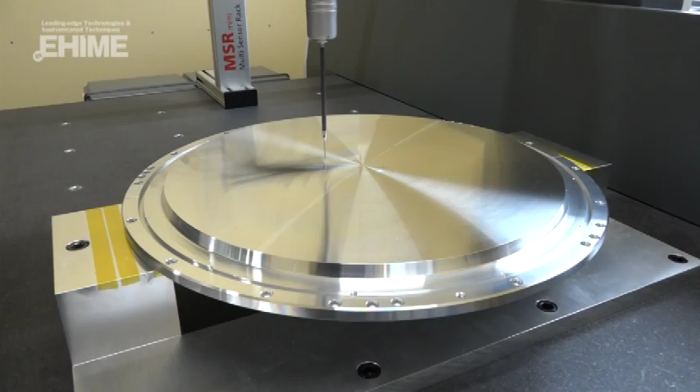Numerous companies attracting attention for their product creation abilities, both in Japan and overseas, are located in the city of Niihama in Ehime Prefecture.

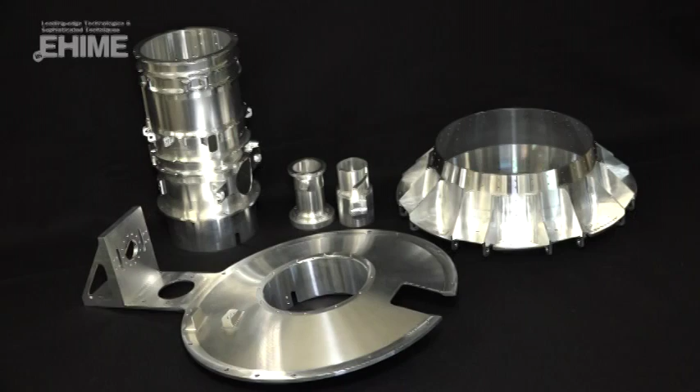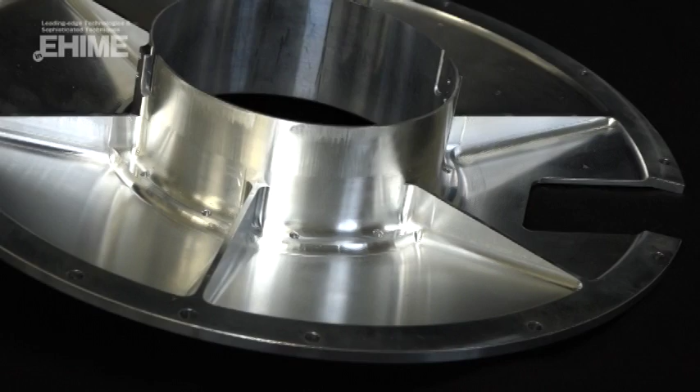This is COS21. COS21 produces components for the aerospace industry, a field which demands high precision. COS21 was in charge of machining the sample collection system for the Hayabusa project, an unmanned asteroid exploration probe. Components making use of COS21's technology and skills were also loaded onto Hayabusa 2.

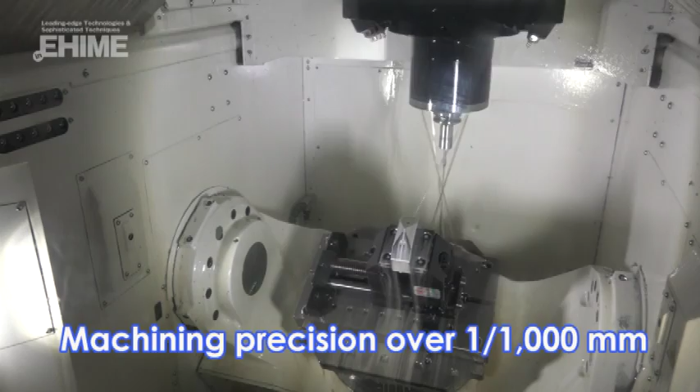Specializing in the precision machining of aluminum and magnesium, COS21 achieves machining accuracies in excess of 1/1000th of a millimeter, among the highest in the world. COS21 provides a stunning 70% of Japan's aluminum sputtering targets.

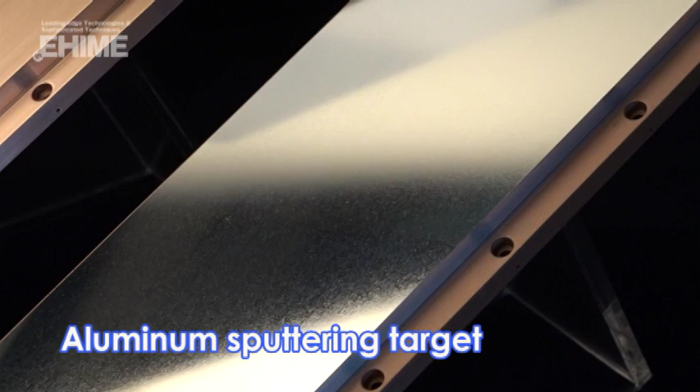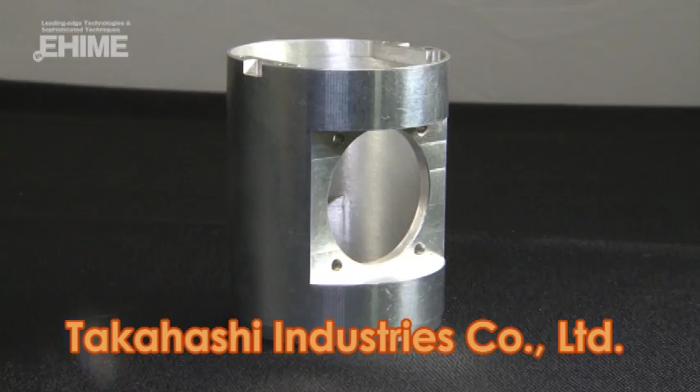Hayabusa was also equipped with SUGOWAZA technologies from 2 other Ehime companies. Takahashi Industries was in charge of machining Hayabusa's sample catcher. Specializing in the precision machining of difficult-to-cut materials, Takahashi Industries is the only company in the world mass-producing pure nickel components for semiconductor production equipment.

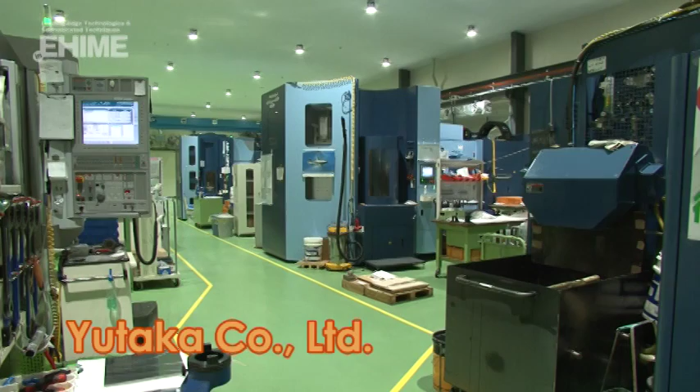Components machined by Yutaka were also used in Hayabusa. Yutaka also specializes in precision machining and has made brilliant advances into the aerospace industry.

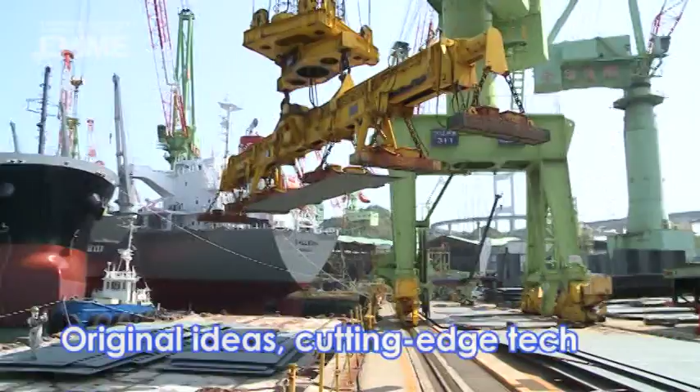In fact, Ehime Prefecture is packed with so-called SUGOWAZA companies, manufacturing and product-oriented companies making use of original ideas and cutting-edge technology to expand their markets both throughout Japan and the world.

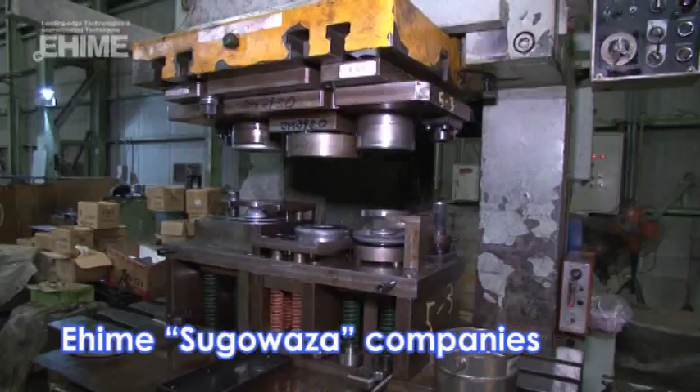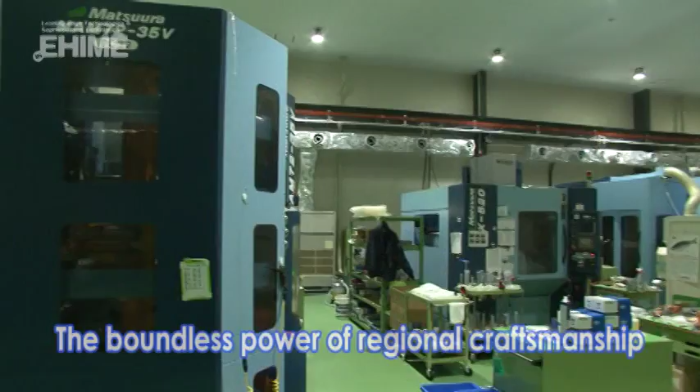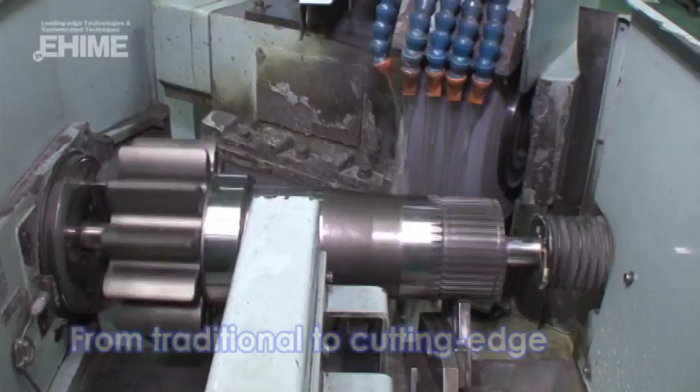Ehime's SUGOWAZA companies continue to take on new challenges by harnessing their diverse backgrounds. They are also taking technologies cultivated over years to new heights. The power of Ehime SUGOWAZA is boundless. Ehime Company Limited is a true challenger and innovator.

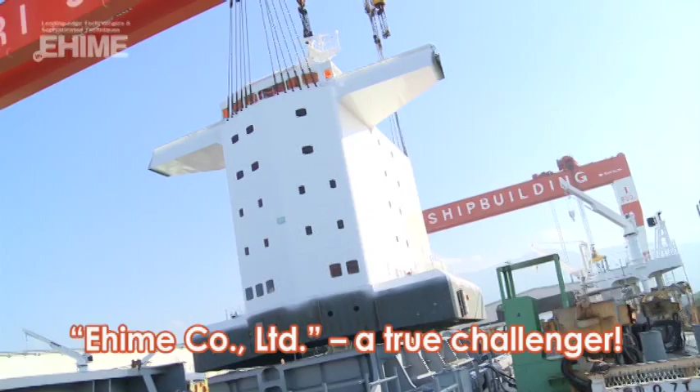In fact, to those in the know, Ehime is a key industrial prefecture, accounting for approximately half of the Shikoku region's product shipments and continuing to grow as an industry-oriented prefecture.

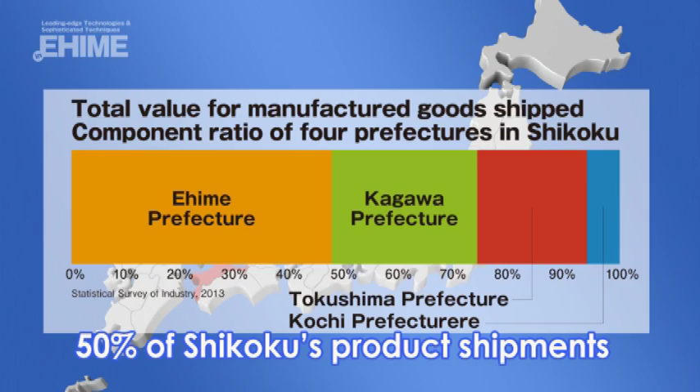Products from Ehime are used far and wide, not just in Japan, but around the world. You just may unknowingly have a product made in Ehime in your own home or business.

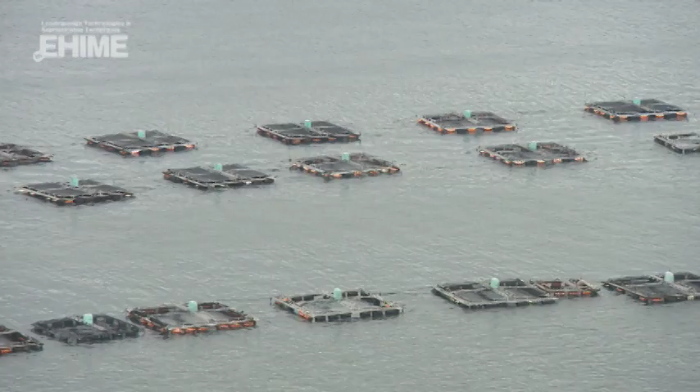Ehime Prefecture is blessed with an abundance of natural beauty and possesses flourishing farming and fishery industries. Thanks to cultivar improvement efforts and technological innovation, the prefecture has experienced particularly striking growth in the production of citrus fruits and fish aquaculture, and has maintained the top production in these areas in Japan for many years.

Ehime is also focusing on flowering plants, including the recent development of a new variety of delphinium named Sakura Hime. In the area of manufacturing, much attention is being paid to the branding of Ehime's traditional Imabari towels. Ehime is well known as the top producer of towels in Japan,

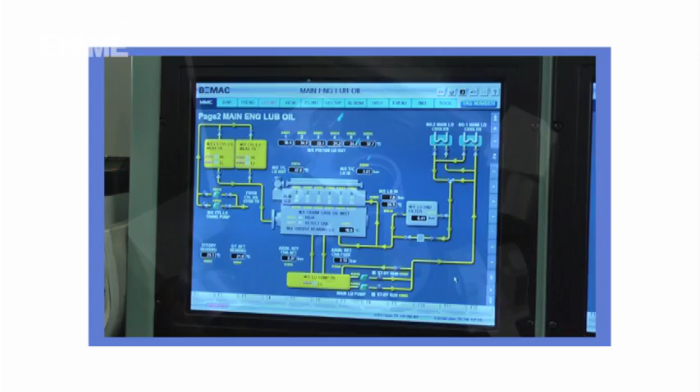but in fact, the prefecture boasts many companies with the top share in their Japanese market in a diverse array of fields, as well as numerous enterprises in possession of one-of-a-kind technologies and techniques.

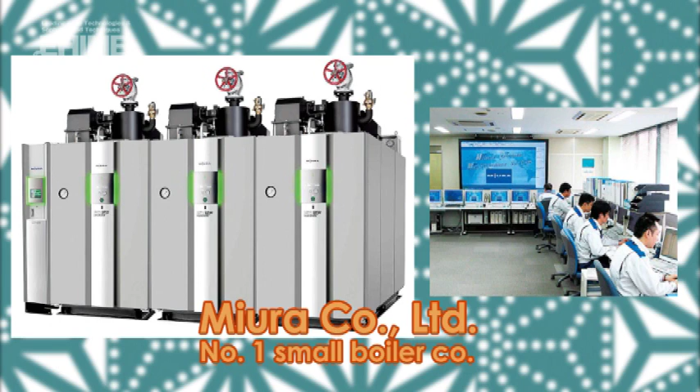Some examples include Miura, which holds an overwhelming share of the nation's small once-through boiler market and has grown into a comprehensive manufacturer of energy-saving equipment and appliances.

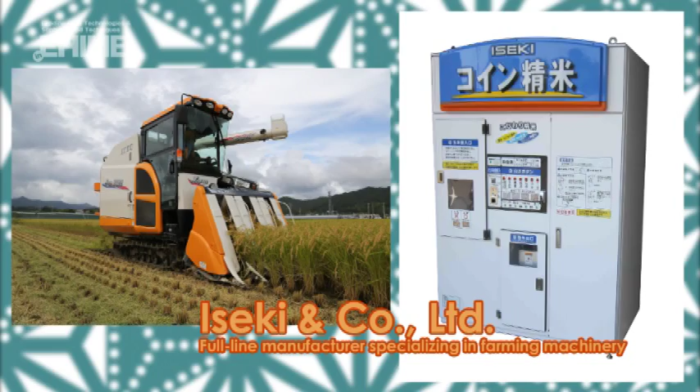Iseki, one of the top comprehensive agricultural machinery and equipment manufacturers in the country. Imabari Shipbuilding, which boasts the highest volume of new ships built in Japan and which is also one of the top shipbuilders in the world.

In addition, since ancient times, the Ehime city of Shikokuchuo has flourished as a production center for paper, and today it ships the greatest number of products in the paper and paper processing industries in Japan.

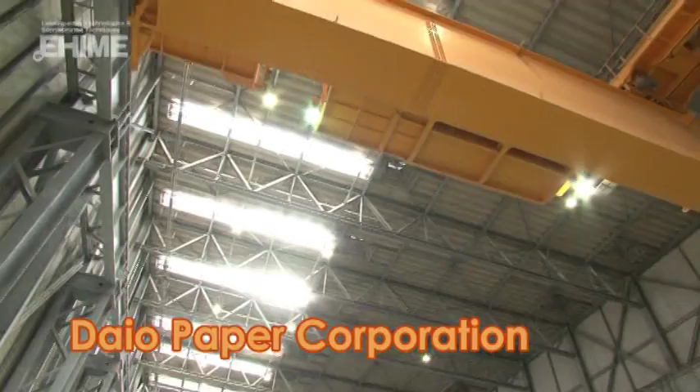Of particular note is Daio Paper, which operates a plant that produces more paper and cardboard than any other single factory in the country.

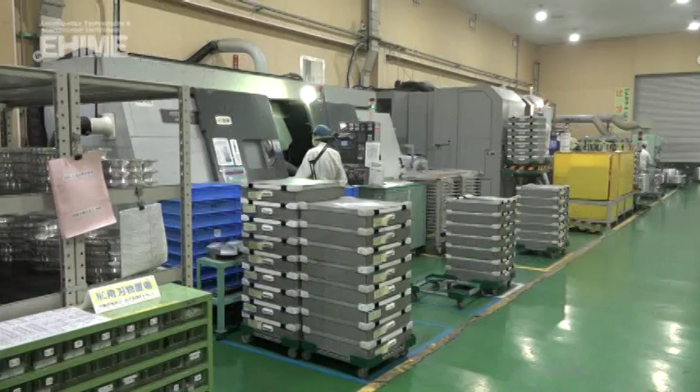Ehime is distinguished by the numerous companies which harness the geographical merits of their locations, make skillful use of regional resources, and employ the diligent local residents raised in the area's temperate climate to further refine their technologies and techniques and continue advancing forward on pioneering tracks of development and growth.

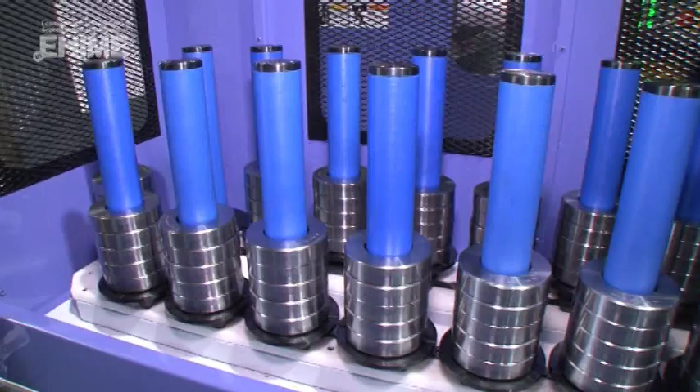Now, let's take a look at some examples of manufacturing and production companies which are backed by long histories and which have continued to grow throughout the years.

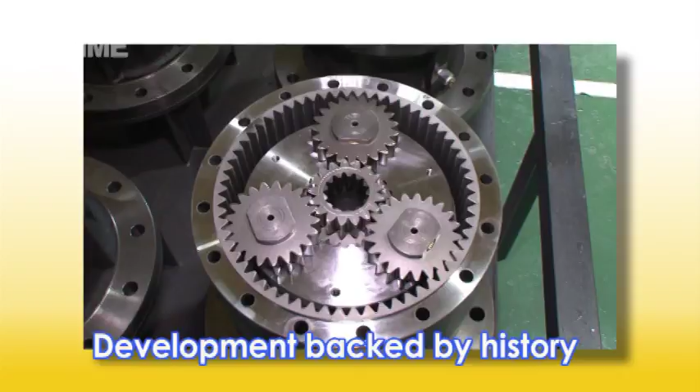From the time the Besshi copper mine opened in 1691, the city of Niihama grew as a corporate town under the Sumitomo Group. Today, the city has accumulated some of the most technologically advanced companies both in Japan and the world, including the metals, chemicals, heavy machinery, and small to medium machinery industries.

One example is Nishioka Iron Works. The company started as a subcontractor for the Sumitomo Group producing tanks.

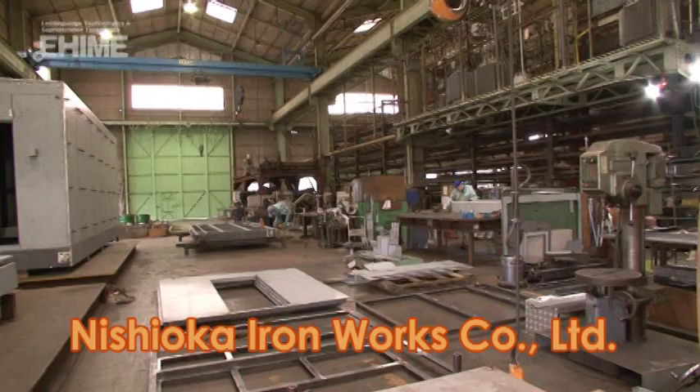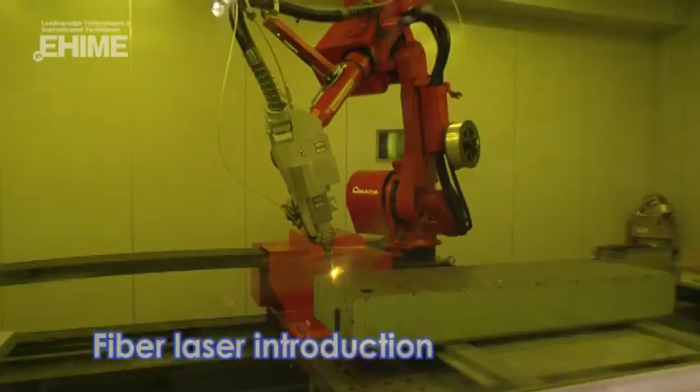Nowadays, making use of such cutting-edge equipment as fiber laser welders, Nishioka Iron Works is one of the leading companies in the nation for thin sheet metal production, creating control panels and a variety of machine covers.

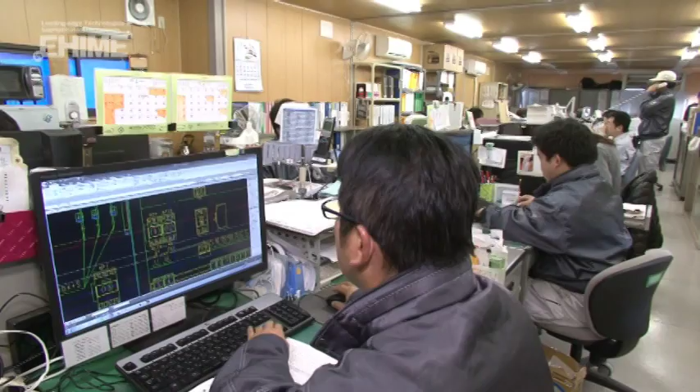Via its integrated production system with group company Nishiki Denso, Nishioka Iron Works has grown to become a manufacturer able to handle the entire production process, from design to manufacturing, painting, assembly, wiring, and inspection.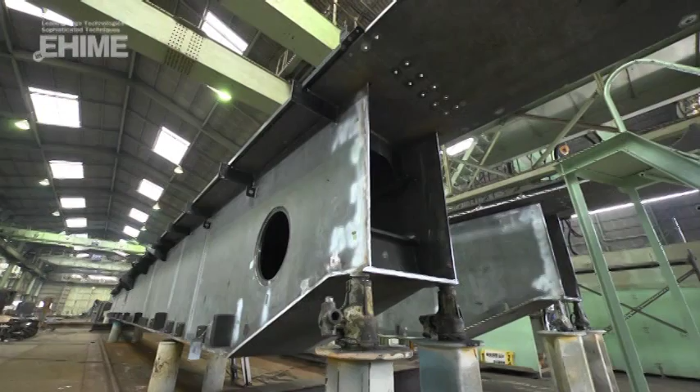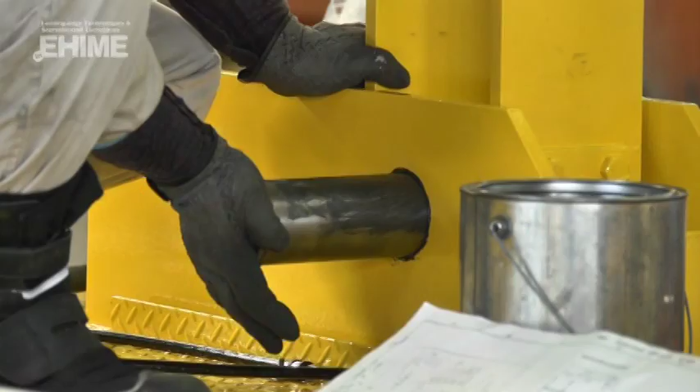Sanko Machinery is also a company which got its start as a factory subcontracting for Sumitomo Heavy Industries. Specializing in overhead traveling cranes, Sanko Machinery manufactures ladle cranes for steel mills and cranes with hooking beams for shipyards. Offering cranes up to the 60-ton class and 48 meters in height, Sanko Machinery boasts high customer satisfaction.

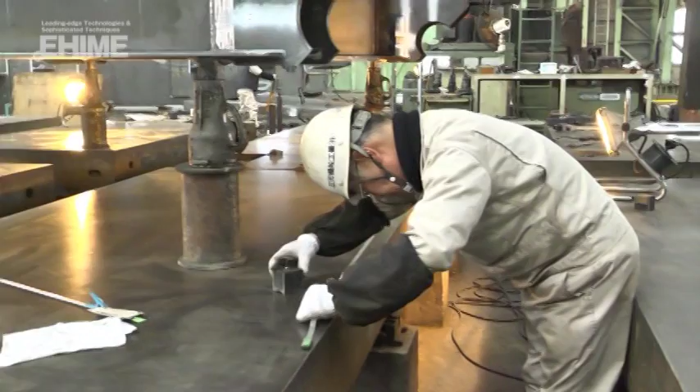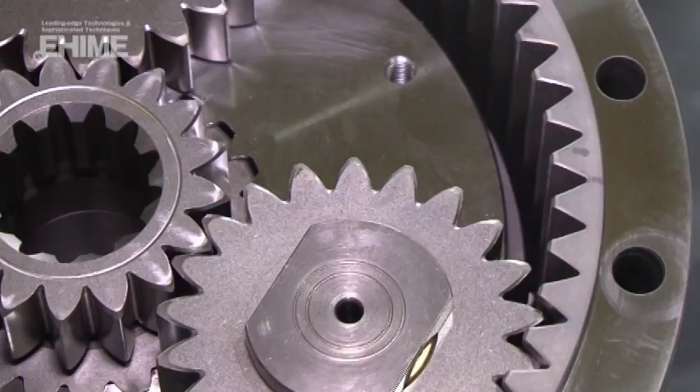Another Niihama-based company produces components found in approximately 30% of all construction equipment worldwide. Sogabe Ironworks' planetary gear mechanisms, the company's flagship product, are used in travel reduction and rotation reduction devices for power shovels. At home and abroad, the high precision of their products have been well received by customers.

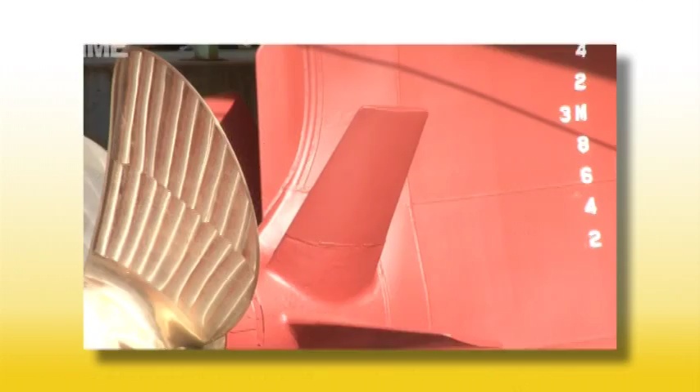Next, we'll look at companies which are continuing to take on new challenges while harnessing strength cultivated over years.

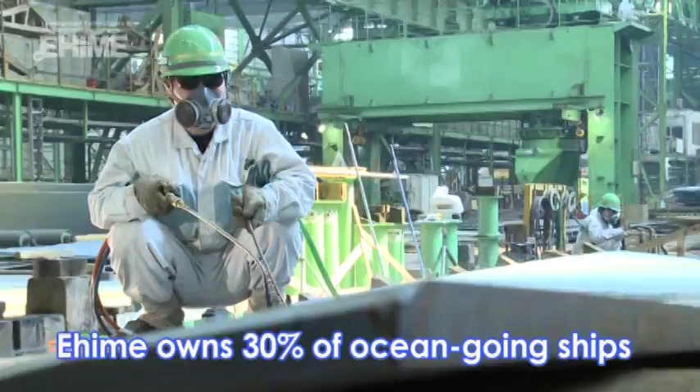The city of Imabari has long been known as a shipbuilding and marine transport town, as well as home to numerous ship owners operating sea shipping businesses. In fact, Ehime Prefecture is filled with ship owners. The ocean-going vessels of Ehime's ship owners comprise over 30% of ocean-going ships operated by Japanese marine transport companies, totaling some 2,700 in all.

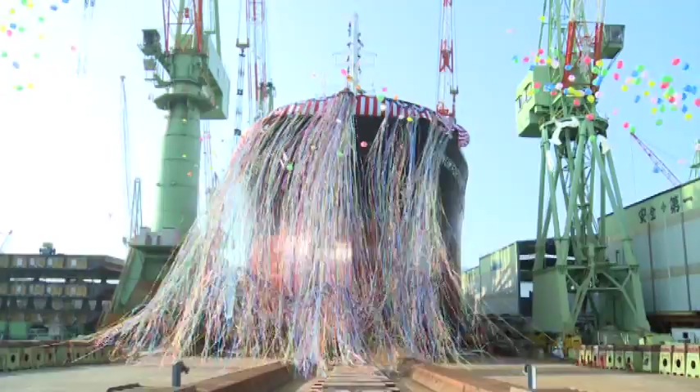Shipbuilding companies boasting some of the top production volumes in the world are also located in Ehime. Indeed, Ehime contains a great number of businesses involved in shipping and the production of ships.

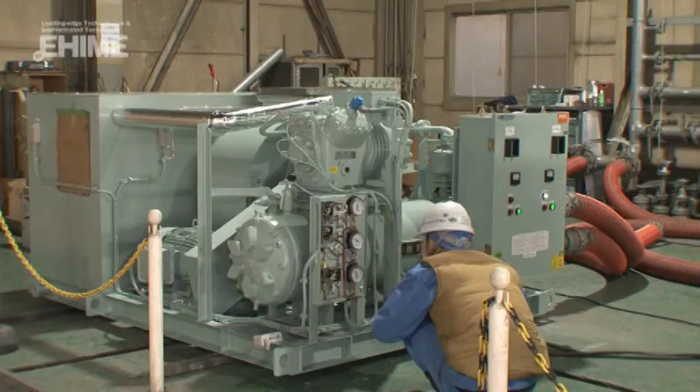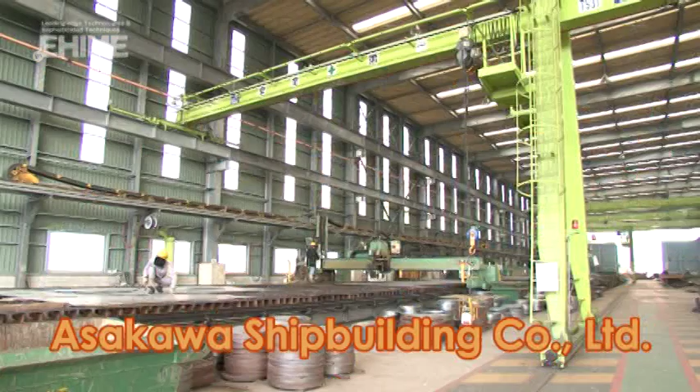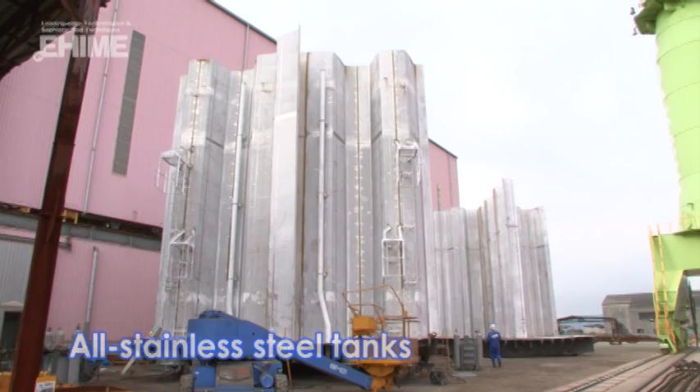Asakawa Shipbuilding specializes in chemical tankers, and they have made unique advances in the field. Over 30 years ago, Asakawa Shipbuilding began using all stainless steel tanks, seen as being very difficult to manufacture. The company is a world leader in the construction of chemical tankers with all stainless steel tanks.

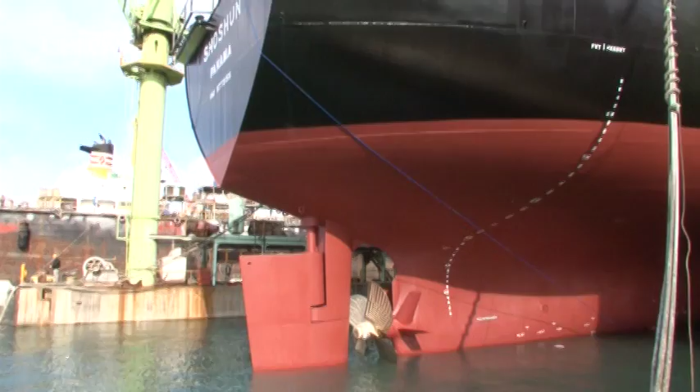Asakawa Shipbuilding has also developed the Friend Fin, a device which improves propulsion efficiency and saves energy. The Friend Fin improves fuel economy by 6 to 8%. Asakawa Shipbuilding is dedicated to developing new technologies.

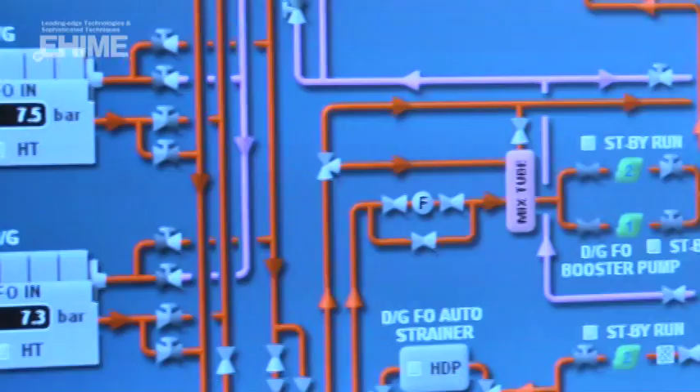Uzushio Electric boasts an overwhelming share of the domestic ship electrical wiring and switchboard installation market. An astonishing 5,000 ships currently in operation are equipped with the company's products.

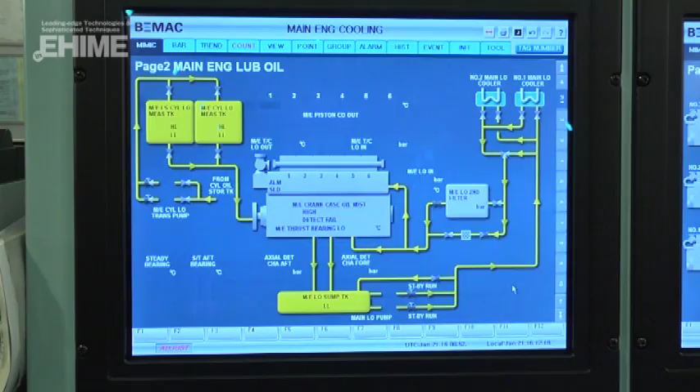Uzushio Electric also provides 24 hours a day, 365 days per year after-sales service for ships operating in waters all over the globe. Now the company is harnessing technology it originally designed for ships to develop electric vehicles. Uzushio Electric is using the new push to go on the offensive with a focus on Southeast Asian markets.

Other Ehime companies are taking on the challenge of turning traditions into innovation. Since the Edo period, the city of Shikokuchuo has flourished as a production center for mulberry and Oriental paper bush, sources of raw materials for making paper. Supported by an abundance of water resources, the city's paper industry grew and thrived.

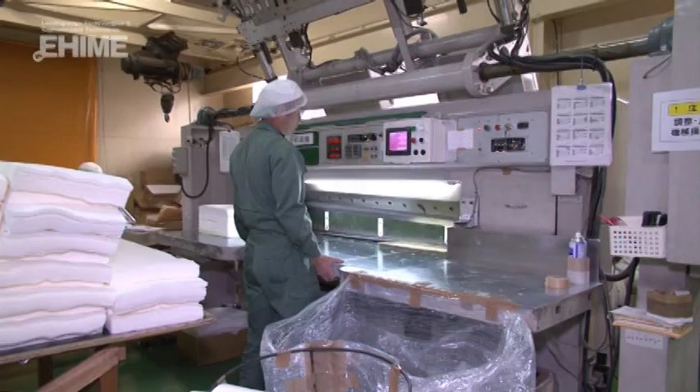Today, some 200 companies involved with paper still operate here, with the city boasting the greatest shipment of paper products in Japan's papermaking and processing industries. In this town of traditions and storied businesses, there are companies which continue to take on the challenge of developing new products and taking on new markets.

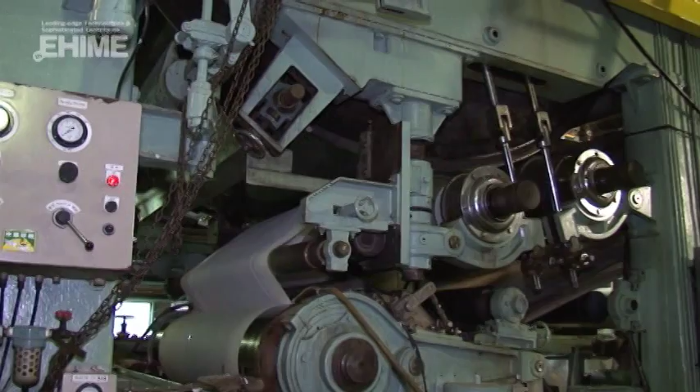Miki Tokushu Paper developed the world's first chemical synthetic fiber paper in 1958. Miki Tokushu specializes in specialty papers such as protective food packaging and insulation paper, boasting a high share in this market.

The company applies technologies such as nonwovens, including reverse osmosis water treatment membrane, vacuum cleaner bag, and foodstuff filters, in addition to spunlace and saturation, to offer products which meet real needs to customers around the world.

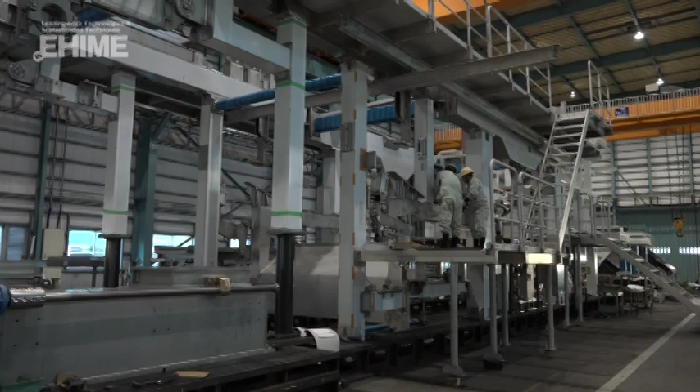Meanwhile, other Ehime companies are supporting the continued growth of the conventional paper industry. Kawanoe Zoki is the top producer of machines for home-use paper in Japan. The company's paper machines, such as the flagship BestFormer Yankee paper machine, offer fast startup and uniform paper texture, boasting over 80% domestic market share.

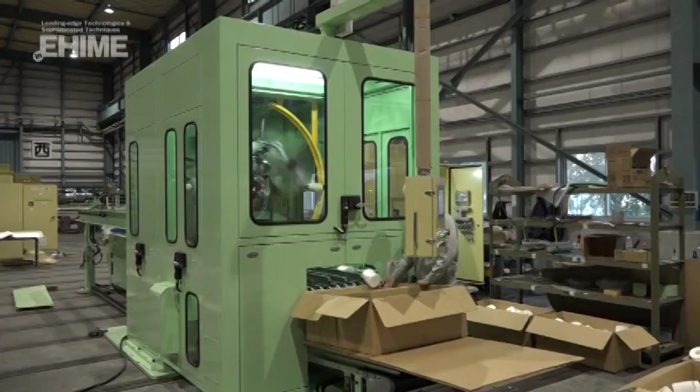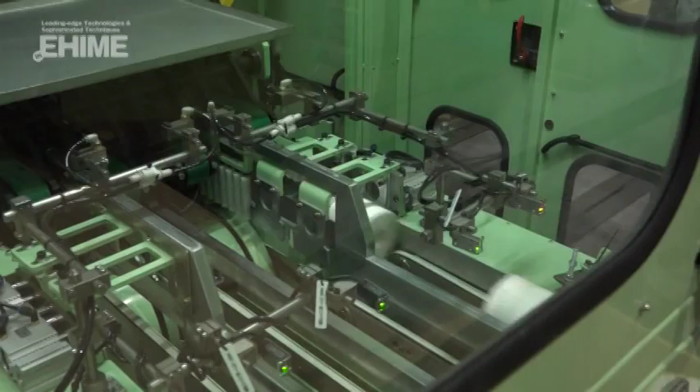In addition, the company's processing machines, actively used in production lines throughout the country, enable automation and labor saving via computer control, while at the same time achieving stable and high-speed consecutive operation for processing lines which wind, bend, cut, wrap, and crush.

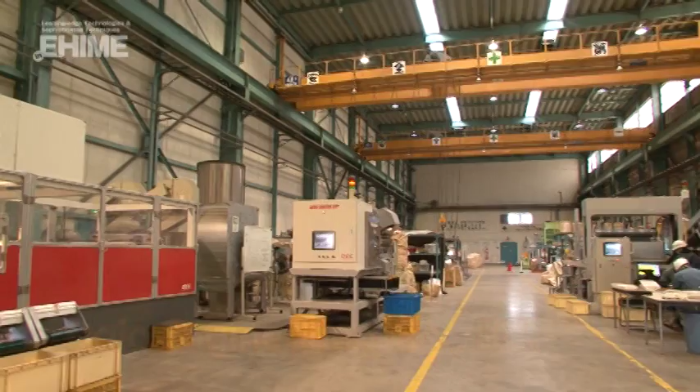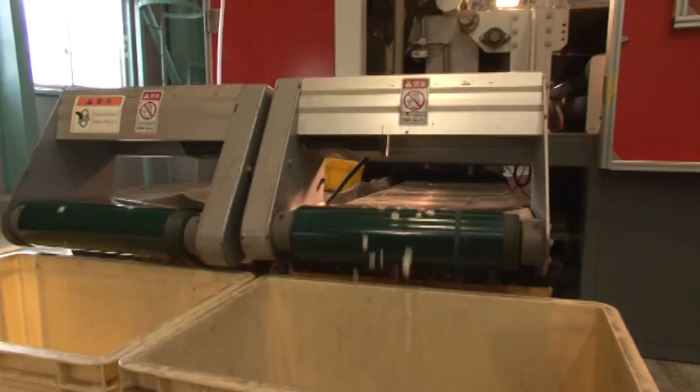Ehime is also filled with a variety of other companies which continue to take on a diverse array of challenges. Working in collaboration with Ehime University, Daio Engineering have developed the Aero Sorter III, a wind sifter for sorting plastics. Combining near-infrared sensors with controlled air jets, the device makes possible the rapid and high-precision sorting of mixes of small, hard plastic particles.

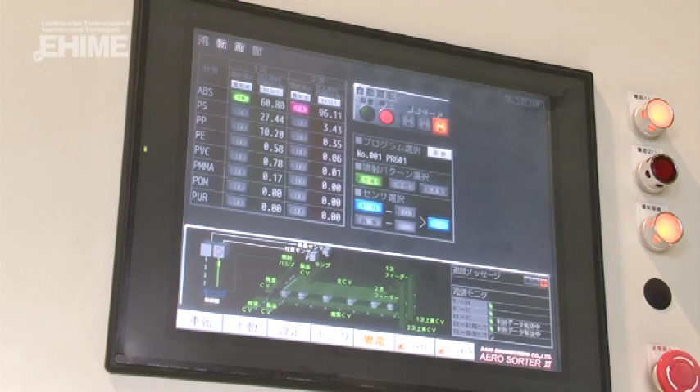In Ehime, universities and the government are actively involved in supporting research and technology development, which has resulted in the production of numerous successful products to date.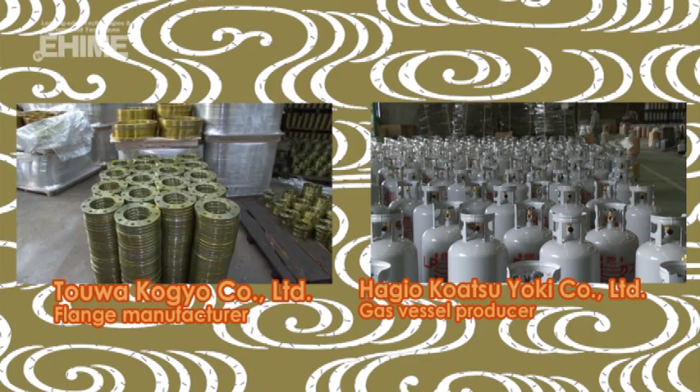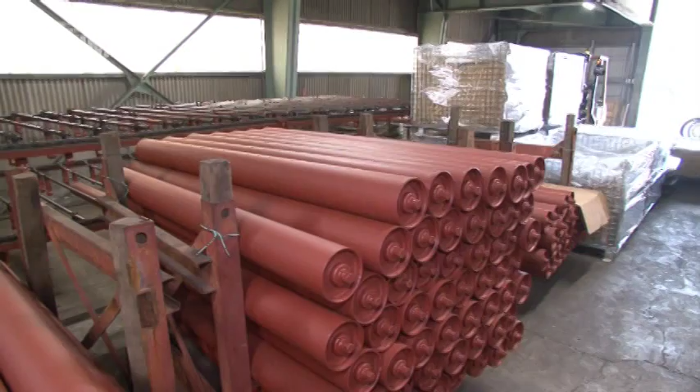One example of this process is the collaboration with Touwa Kogyo, the Shikoku region's only flange manufacturer, and Hagio Koatsu Yoki, a producer of gas vessels. Harnessing the specializations of each company, flange and gas vessel production technologies, belt conveyor rollers were developed which are more durable than ordinary products thanks to an internal bearing seal design. This technology is now being successfully employed in cargo handling equipment on ships for hauling wood chips.

One can also find companies in Ehime that have achieved solid shares in niche markets. For instance, Kaneko is a producer of party crackers and boasts an overwhelming share of the domestic market. Parties across Japan are made more lively thanks to Ehime crackers.

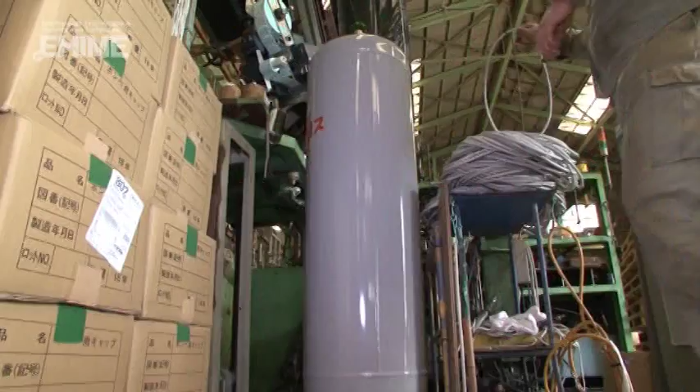As you can see, Ehime Prefecture is filled with unique products and technologies used around the world, created by harnessing local strengths and making clever use of regional resources.

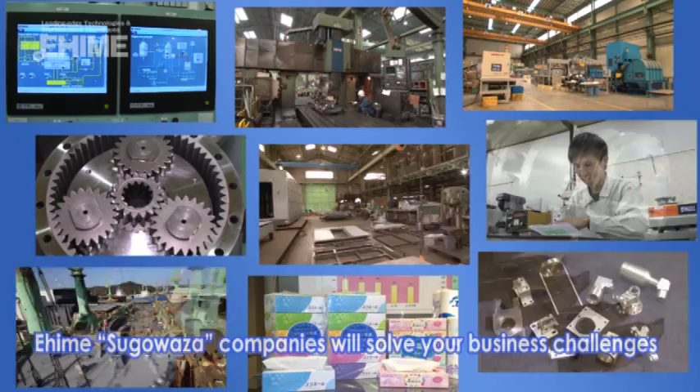Ehime's engineers and craftspeople are not content to rest on their laurels, however. They continue to take on new challenges each day. You are sure to find an Ehime SUGOWAZA company that will be able to solve your business challenges.